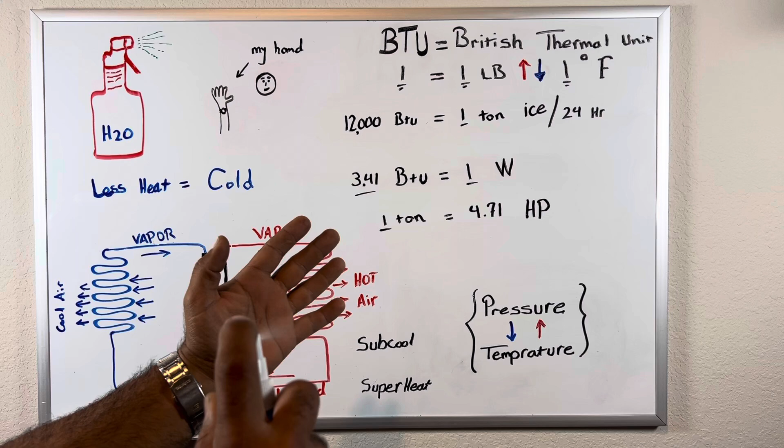Now we're gonna learn what air conditioning is in like 5 seconds. Here we go. We got a spray bottle, we got the hand. We're gonna do this a little bit and then move, and here we go. That's pretty much the basic air conditioning. Congratulations, now you know what air conditioning is. Let me put this bottle away. And we're gonna go over what just happened.

We sprayed some liquid over my hand, and I moved my hand in the air, and my hand started cooling down. Now pretty much this is what happens in the air conditioning. The only difference is everything is controlled. Over here we had some water wasted to cool my hand down for no reason.

So we removed heat out of my hand, and how did we do that? When I spray my hand with water and I start moving my hand, the water that was over my hand starts getting evaporated. And for that to happen, that water needs to remove heat out of something to change state from liquid to vapor, and that something was my hand right there, and that's how we dropped the temperature. So we removed heat. There was less heat on my hand after I did that.

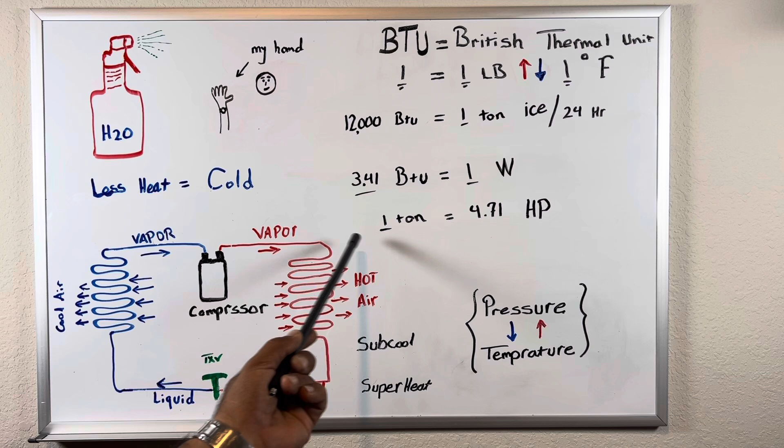That's how air conditioning works pretty much. You remove the heat out of the area that matters to you, like inside your house, inside your freezer, inside your refrigerator, or whatever the case might be. You remove the heat out of that area, you transfer the heat outside where it doesn't matter to you, and you're gonna dump it in there. You remove the heat from your house, dump it outside, everyone's happy.

Pretty much the same principle in your car, in the walk-in freezer, walk-in cooler, a mini air conditioning, a big air conditioning, chiller, doesn't matter. Everyone follows this procedure. Now, we're gonna have quite a few terminologies in this area that we're going to be using. One of them is called subcool, and the other one is called superheat.

As I mentioned earlier, there is going to be a saturated liquid passing the metering device. It is a liquid mixed with gas at the same time. It is just ready to either turn to vapor or back to liquid. Depending on if you're adding heat into it, it's going to turn to vapor. You remove heat out of it, it's going to turn to liquid. This is called saturated liquid.

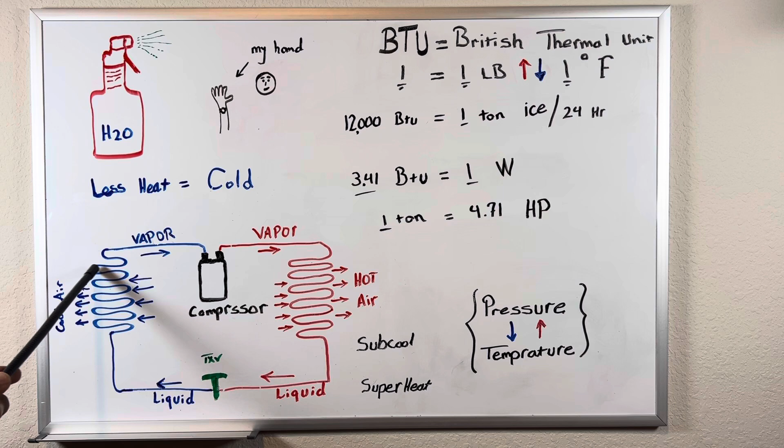The more heat you add to this liquid, the faster it will turn to gas. And as soon as it turns to gas, your superheat starts. So somewhere all the way at the end of this evaporator coil, with the system working properly, you're not gonna have any more liquid left. And anything past that is just gonna be gas only, and it goes back to the compressor. Now, the more heat you add into that liquid, the higher your superheat is going to be.

That's called superheated gas. If you touch that line, which is the suction line of the system, to our sense it is cold, but that's a superheated gas because it's past its boiling point at that pressure. And for superheat, most residential air conditioning is looking for somewhere between 8 to 12 degrees as a perfect superheat range. Same thing for the subcooling, 8 to 12. That's a perfect range, but it could be different depending on the system design, compressors, or the metering device. Those numbers could vary.

Same thing, subcooling is happening over here as well. Now, the very hot vapor, superheated vapor, comes in. It's not very superheated, but it is at some point. And since the compressor is compressing that gas, the vapor that comes out of it is even more superheated. So very high pressure, highly superheated gas comes out of the compressor and goes through the condensing coil. When you remove heat out of that refrigerant, somewhere down here, I would say 75-80% past the coil.

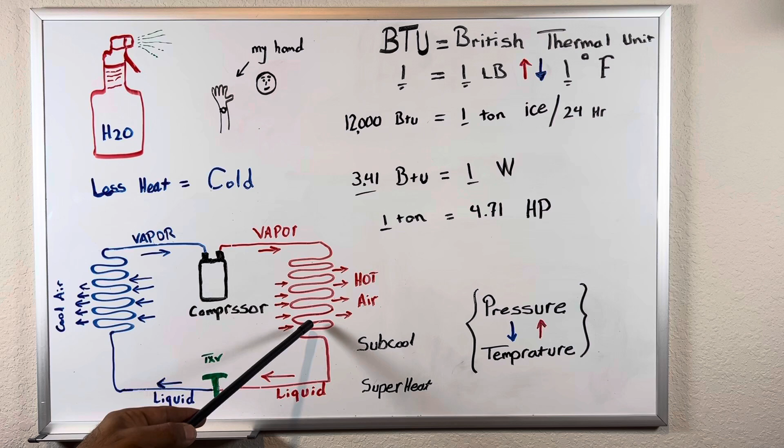That refrigerant is gonna turn to liquid. And when it comes out of this condenser, it's gonna be a liquid. Now, any more heat you remove out of this refrigerant that is flowing, or pressure drop that takes place when this refrigerant is flowing, you're gonna start adding subcooling to that refrigerant. These are very important numbers that we're gonna have to have across a system for a system to work properly. So we're gonna have subcool right over here at the end of our condensing system.

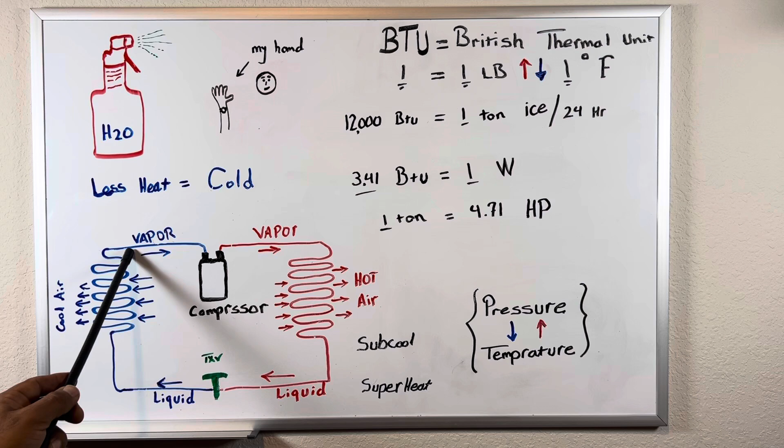We're gonna have superheat at the end of our evaporator coil. So these two ends are gonna have these two. Then at the outlet of our compressor, we have superheated gas again. So we're gonna read superheat in two different areas of the system. Subcool, we only read it at one area of the unit. This is a basic air conditioning. That's how it's designed, how it works.

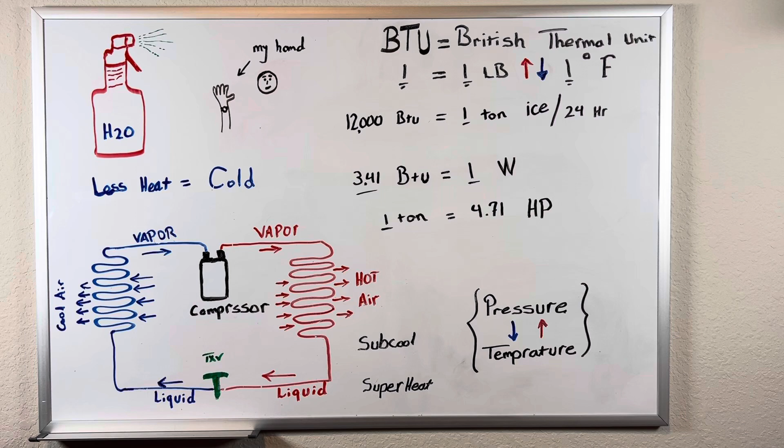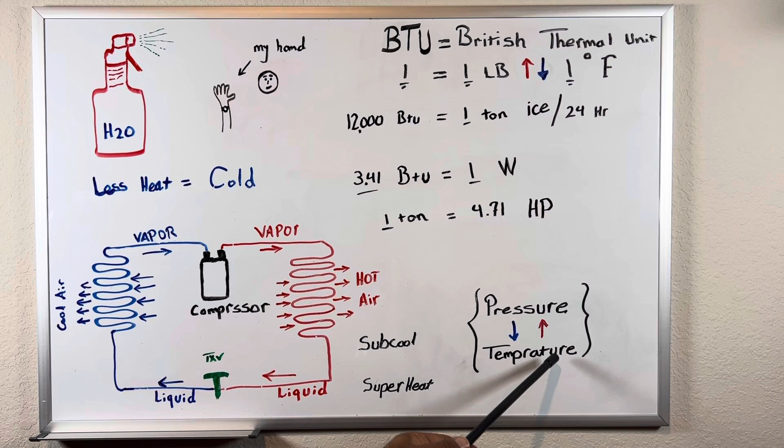Pressure and temperature, they always work together. The higher the pressure, the higher the temperature. The lower the pressure, the lower the temperature, or the other way around. If you drop the temperature, you remove heat, the pressure will get reduced. And if you add heat, increase the temperature, your pressure will go higher.

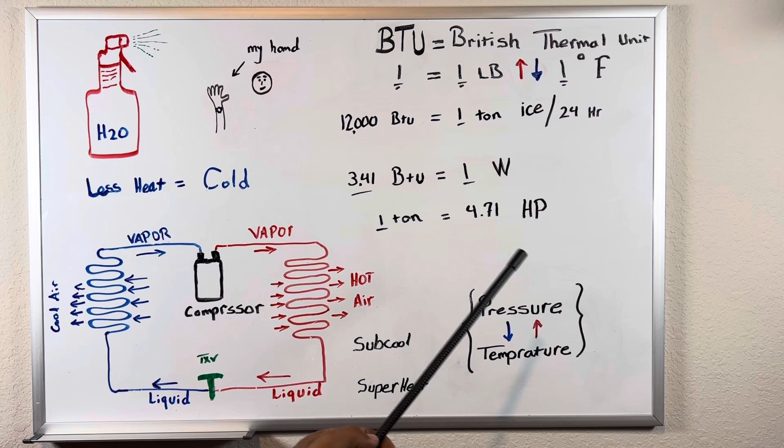Now, how much energy do we need to make this happen? This is something that we're gonna calculate with BTU. BTU stands for British thermal unit. Now, all these calculations and numbers are based on ice and water. How much is 1 BTU? How much energy is it? 1 BTU is equal to 1 degree change in 1 pound of water.

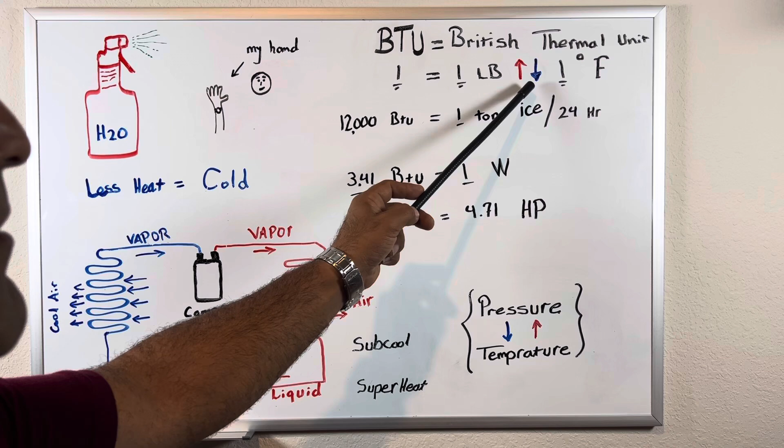So if you have 1 pound of water and you increase the temperature by 1 degree, you just used 1 BTU to do that, or the other way around. If you remove 1 degree out of 1 pound of water, you just removed 1 BTU. Every 12,000 BTU counts as 1 ton. That's a little bit ice related. I really don't want to get into that, but 12,000 BTU, 1 ton of ice in 24 hours.

What that means is you can have ice at 32 degrees, you can have water at 32 degrees. Now, if you have a ton of ice at 32 degrees, it will require 12,000 BTU to make that ice into 32 degree water. The temperature has not changed. Just the state has been changed from ice to liquid. That's called latent heat.

Sensible heat is the heat that we can sense with our body. We can put it on the paper, we can show it. Your thermostat is gonna show you the sensible heat. But latent heat is very important in any refrigeration system. You have 32 degree ice, a ton of it, 2,000 pounds. Now, you require 12,000 BTU to make that ice just liquid. You haven't changed the temperature at all. You just changed the state of ice to liquid.

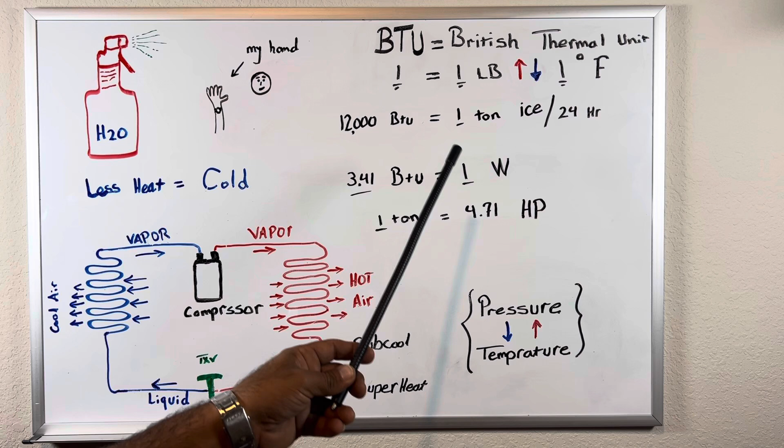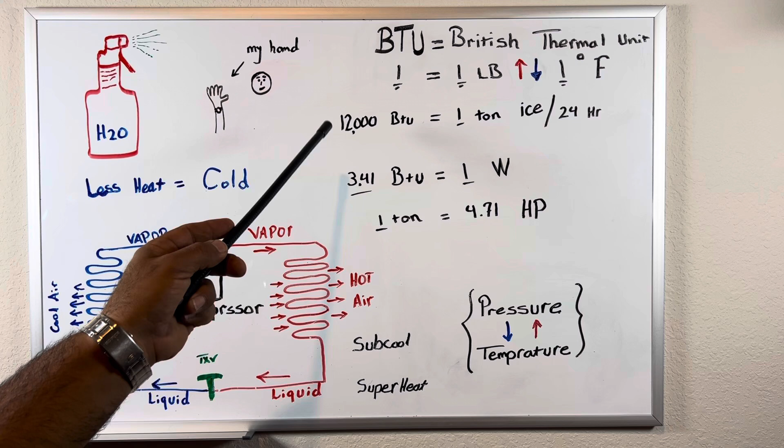Now, in refrigeration systems, like freezers, coolers, stuff like that, they don't use BTUs. They use horsepower for system ratings. That's the only reason that I put it down here. It's a good thing to remember. Every ton of cooling is 4.71 horsepower. That's mainly used in refrigeration. BTU is used in air conditioning. This is it for today.